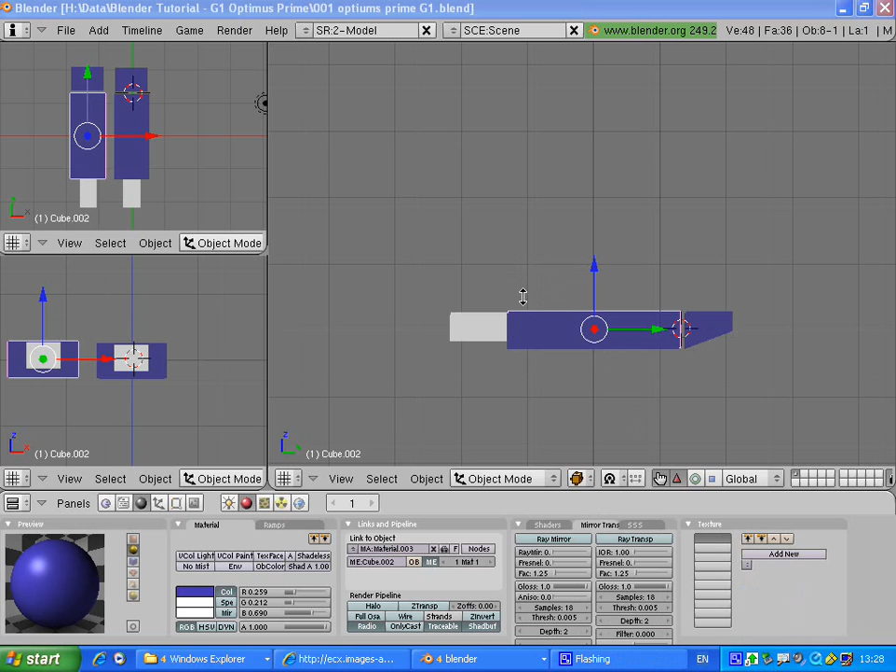What we need to be able to do is create the wheels and the fuel tank. We'll do the wheels first, but just before that we're going to ensure the parenting is all correct. I created these as my parents. This is a child of this parent, this is a child of this parent, and the same with the opposite side. So that's working good.

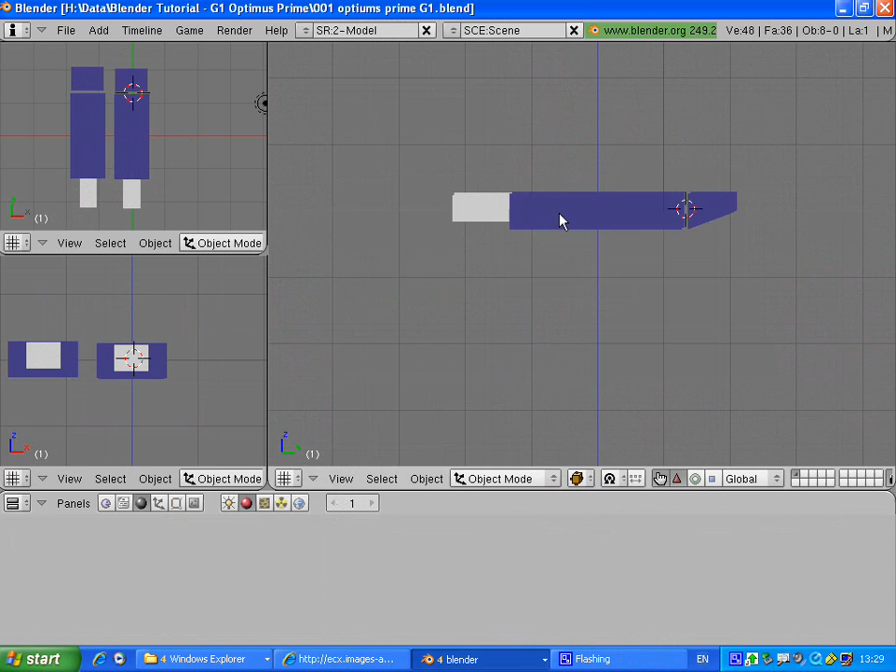I'm going to get a side view, press A, and add a cylinder. I need to rotate that cylinder on the y-axis, rotate Y 90, bring it out, and resize it down.

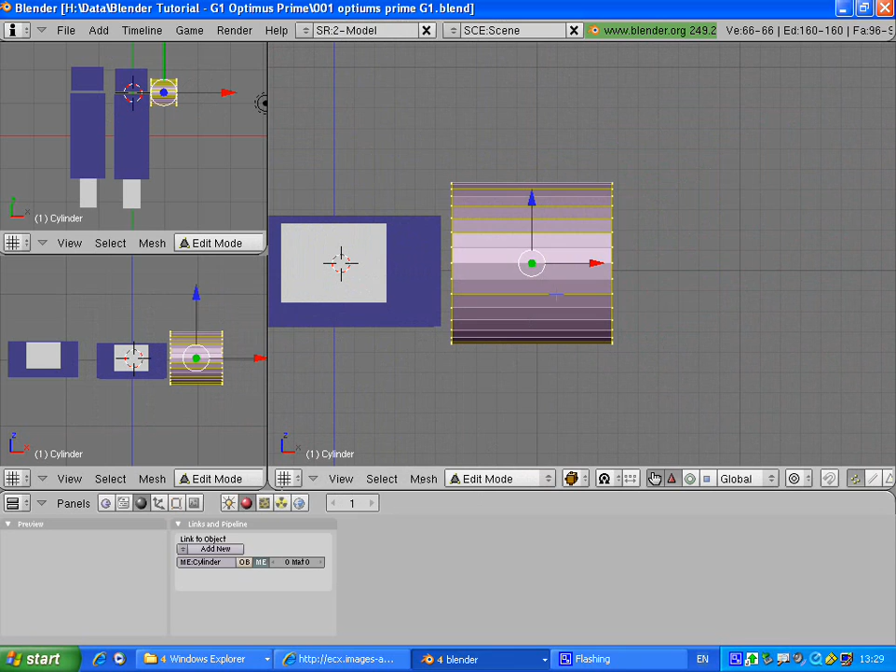I'm going to go to front view and zoom up. Go to edit mode, press A to deselect, press B and select this side vertices here. I'm going to move that in till it's about a centimetre away. Then press S for size, make it a bit larger, E to extrude the region out, E to extrude again, S for size, so there's my wheel.

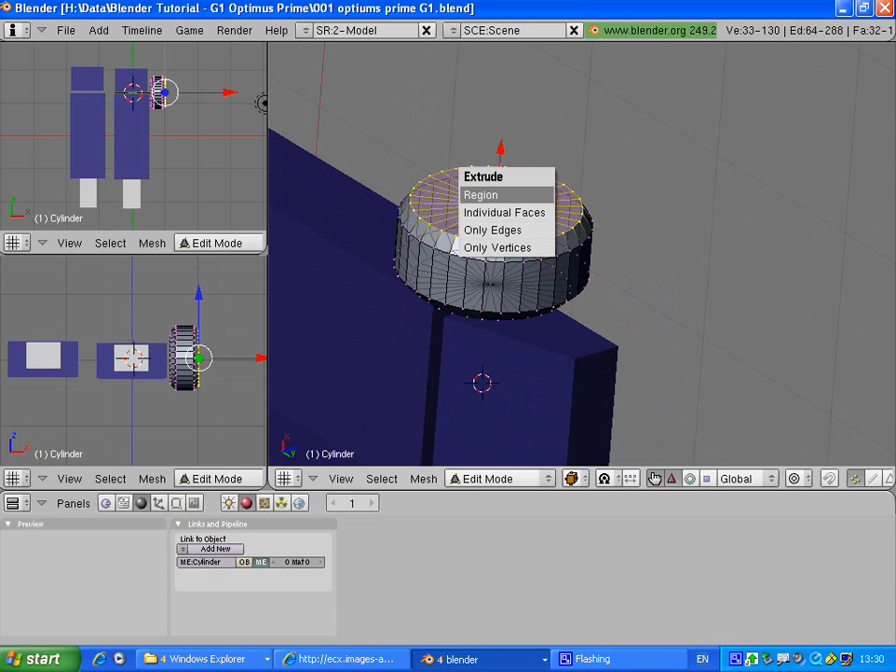We need to do the interior hubcap though, so I'm going to get into a view so I can see it easily. Press E to extrude a little bit, S for size, come in a bit, and then E to extrude the region down.

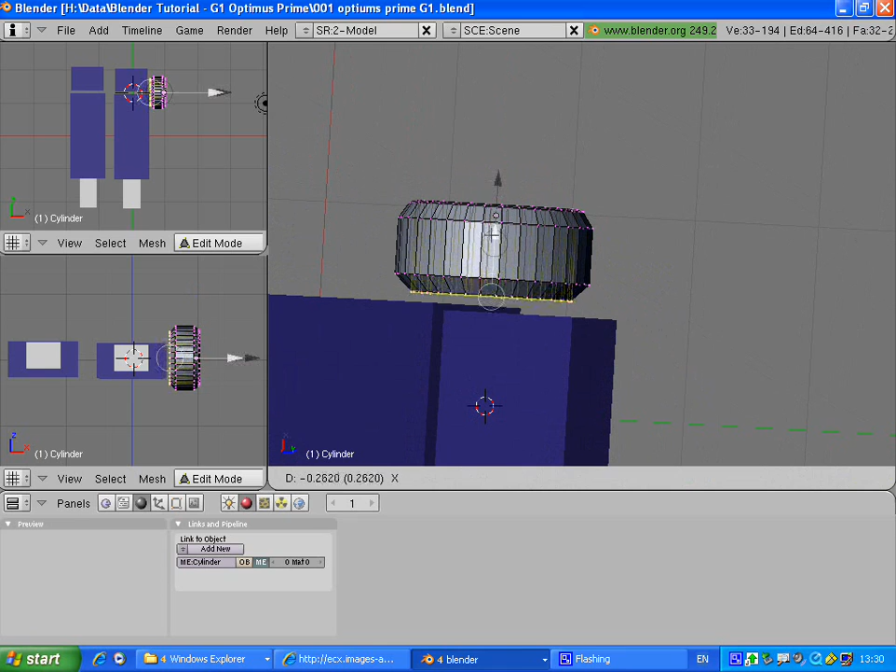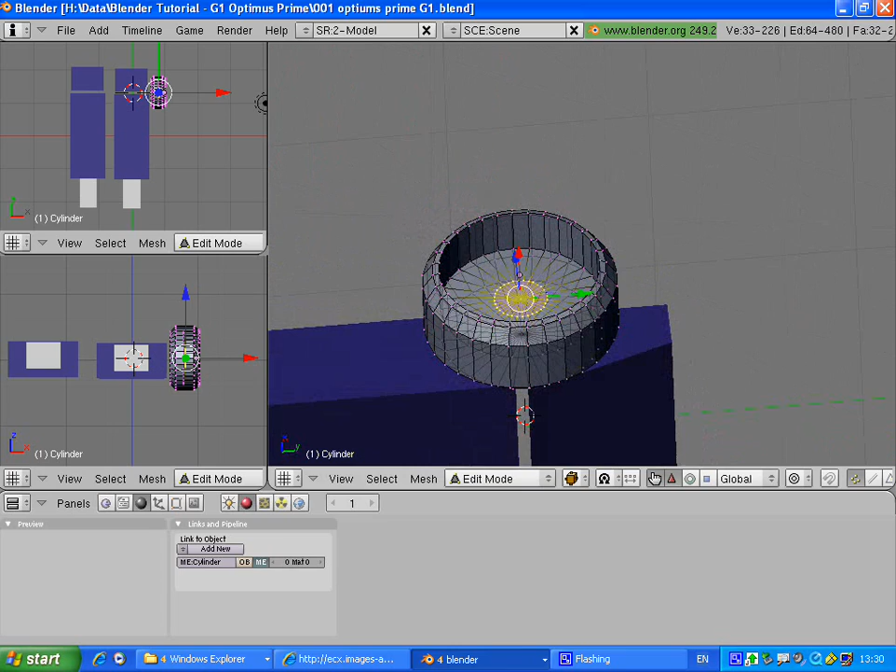Often when going down, you should come onto the side view so you can go as deep into the wheel as you need to while still seeing what's going on. I'm going to go halfway into the wheel, press E to extrude again, go up a little bit, resize it in to the center, and again check the side view. I'll have a slight incline and press E to extrude the region up a little bit. There's pretty much my finished wheel, so I'm going to go back to object mode.

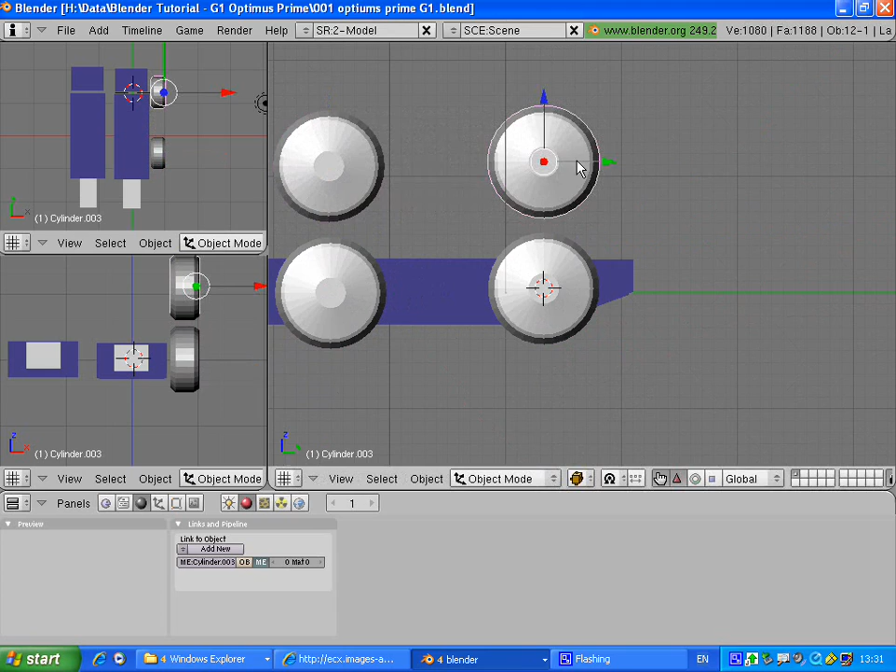I want to duplicate that, so I'm going to go to side view. Press Shift D to duplicate, Shift D to duplicate, Shift D to duplicate. I've got now 4 wheels.

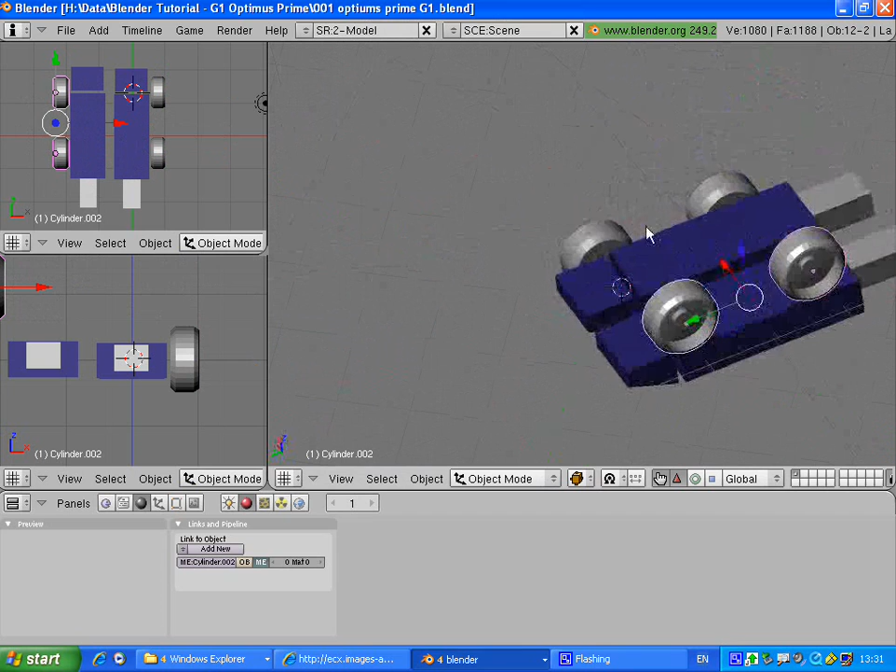I need to select these two, move them across to the other side, using these views to make sure I'm pretty close. I'm going to rotate on the Z-axis 180 degrees and turn them around, and then bring them around like this and down.

I'm going to go back to side view, because I actually want to select these wheels and bring them up a bit, using these views to ensure my wheels are comparatively the same distance apart.

The next thing we need to do is, if my truck tries to move at the moment, the wheels won't move as well. So I need to right click a wheel, press Shift, right click the body of the wheel, press Control P and make parent.

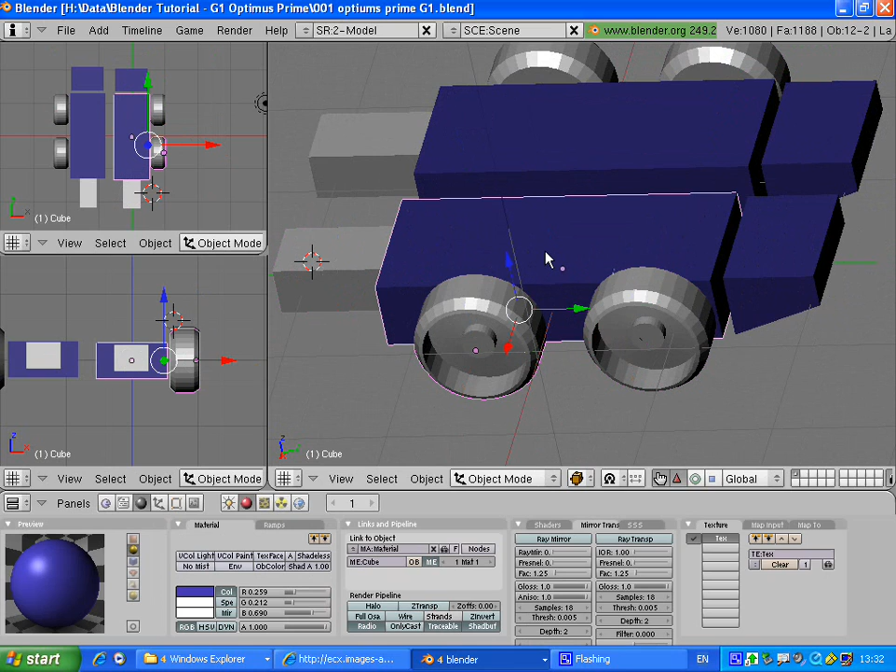Control P, make parent. Right click the wheel, press Shift, right click the middle part, Control P, make parent. Same with the other side, right click the wheel, press Shift, right click the middle part, Control P, make parent, right click this wheel and this part, Control P, make parent.

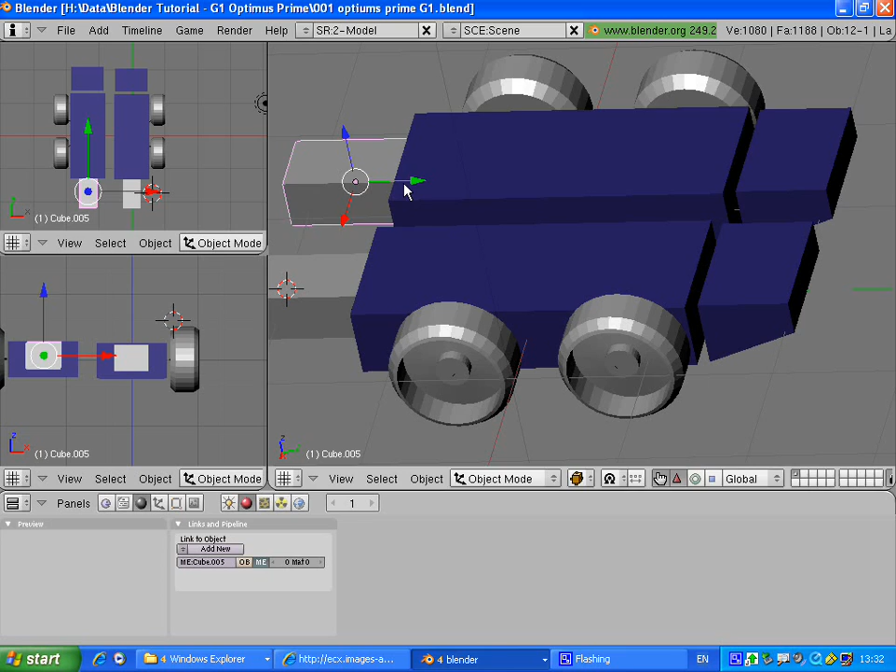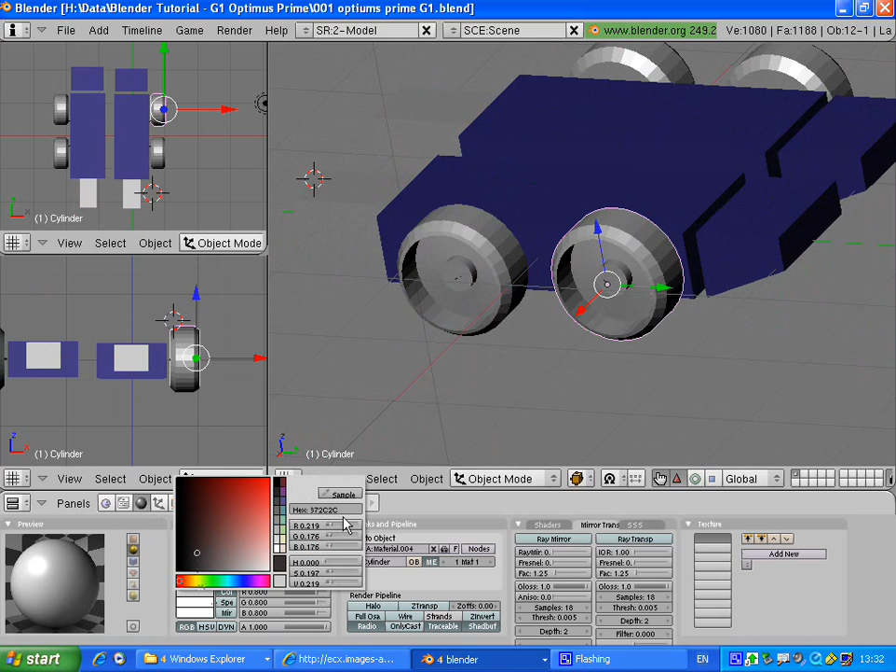We're going to right click the wheel, click on our shading and material buttons and add new, click on our colors. I want a fairly dark grey. I'm going to select the hexadecimal code, copy it and press enter, then go to the next wheel, add new, and copy the hexadecimal code in. Go to the next wheel, add new, copy the hexadecimal code in, next wheel, add new, copy the hexadecimal code back in.

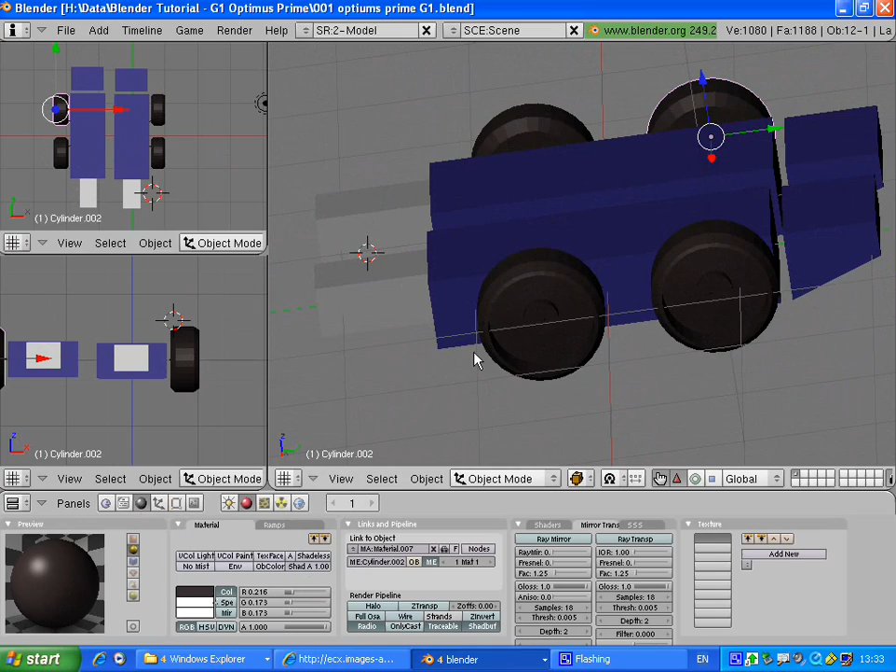Okay, at the moment we've got 4 wheels. We also need a fuel tank - if we look back on our Optimus Prime, we'll see there's a fuel tank up near the wheels, and it's a nice shiny silver one.

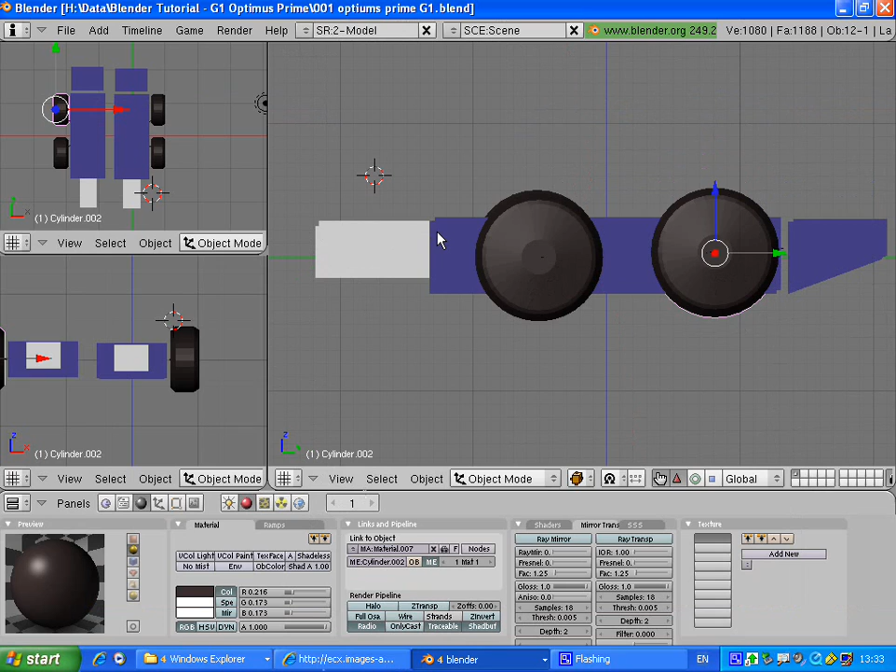I'm going to go back to side view, and that's something I encourage you to do every single time, is always go back to a view, A to deselect. I'm going to add a cylinder, rotate it on the x-axis 90 degrees, resize it down, and it pretty much is a case of placing the cylinder on the wheel.

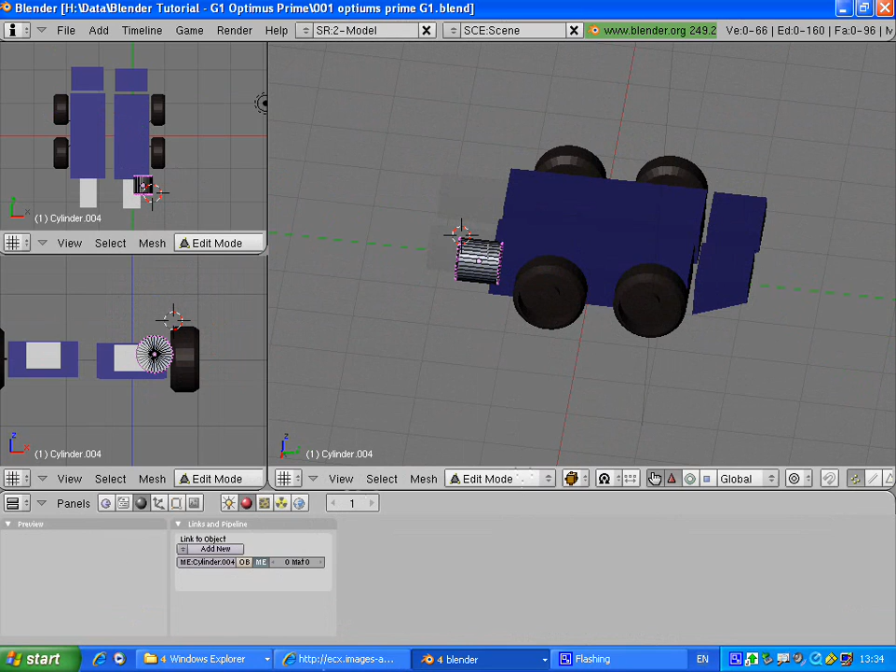And then extruding one end of it like so. It all depends upon how fancy you would like to get with your cylinder and how big you want it to be.

You can just make the cylinder and put it on the side there, and that's like the fuel tank. On the flip side, some people might want to size it down a little bit and go to side view. A cylinder - actually it's not just a full cylinder, and little detail in a model adds realism.

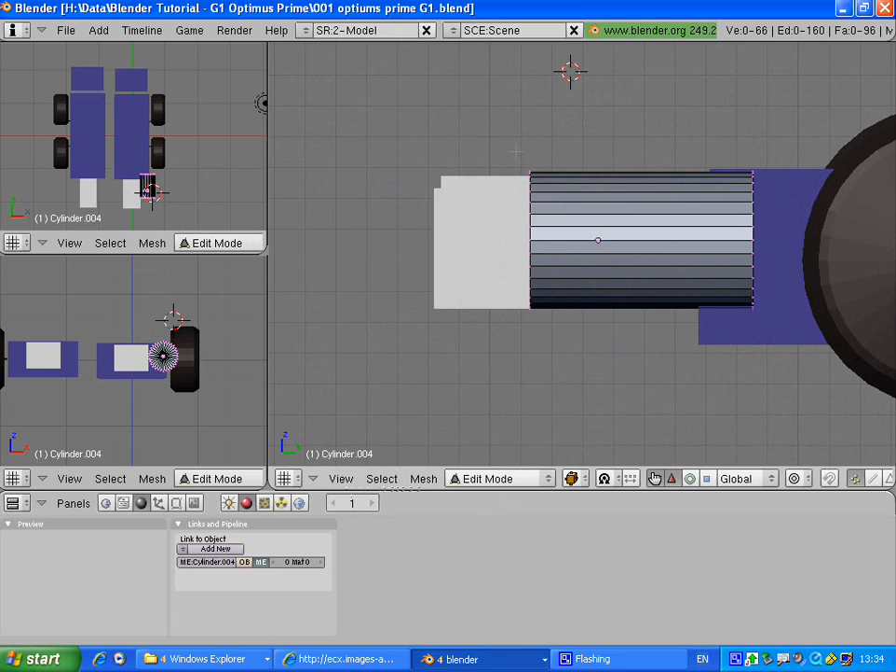I'm going to press A to deselect, press B, select my cylinder here, get a little bit closer, press E to extrude out, size it down a bit, E to extrude out, press S for size, E to extrude, S for size.

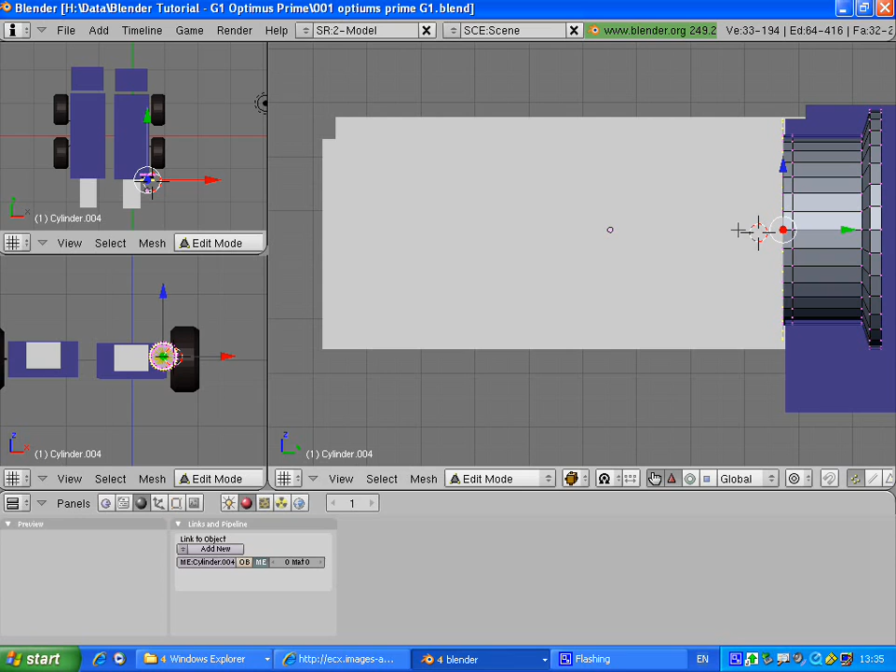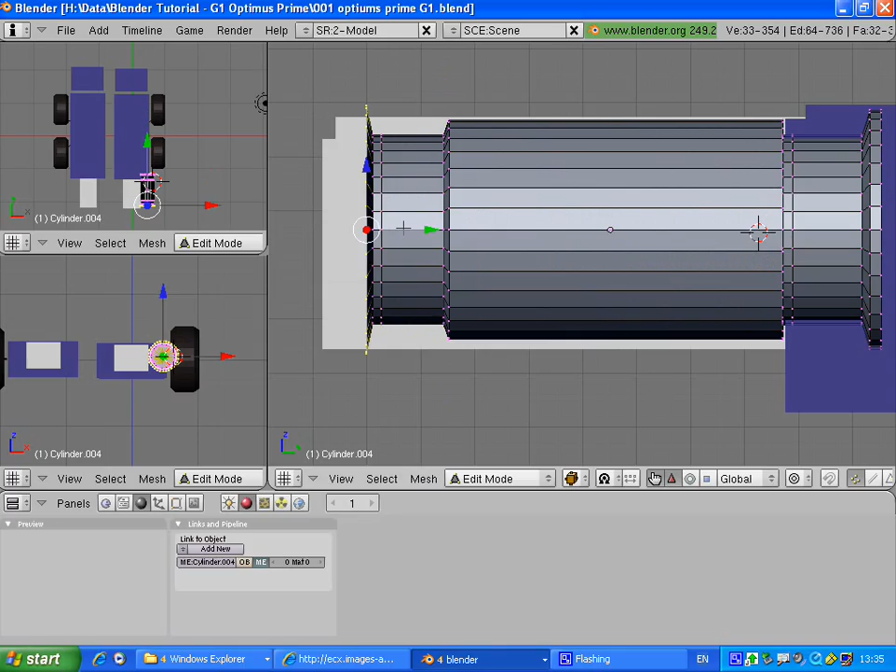Extrude it out, extrude it out again, press S for size, might size it in a bit, E to extrude it, and then E to extrude it once more, and size it out, and E to extrude it. So I've got a bit of a piston type fuel tank cylinder.

I'm going to go to object mode, select it, make it a bit smaller, and the last thing I need to do is 2 things.

I need to first shift D and duplicate it, select this cylinder, make it appropriate size, same with the other one, and I need to parent it to the wheel.

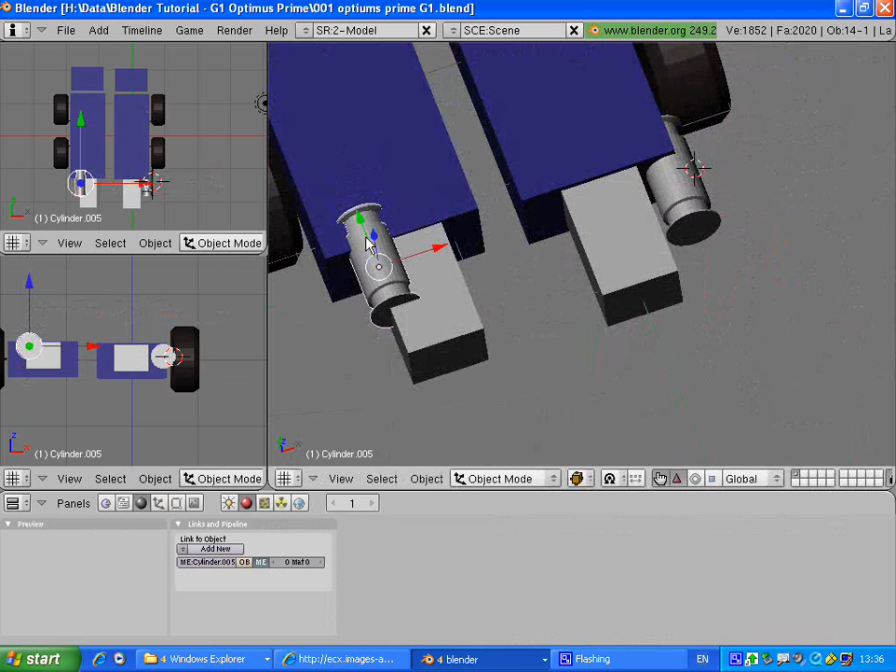Same deal, I need to take this one, take it to the other side, drag it down like so, and select it and parent it to the wheel.

So now we've got some cylinders for fuel tanks, and either side of the wheel moves, it'll move with us. That's all for this tutorial. In the next tutorial we'll start looking at the body.